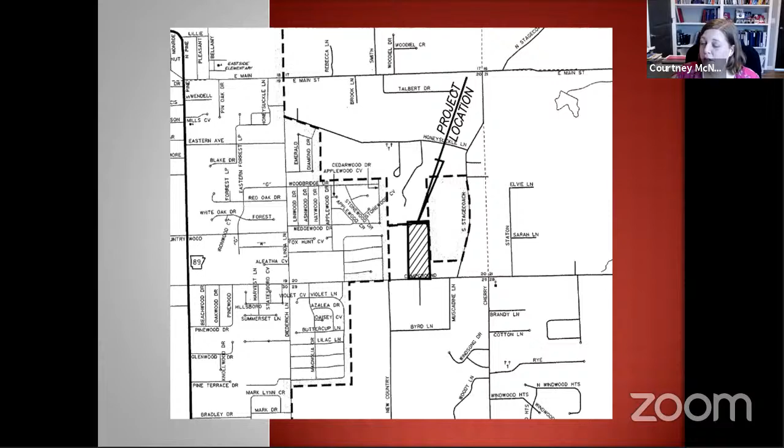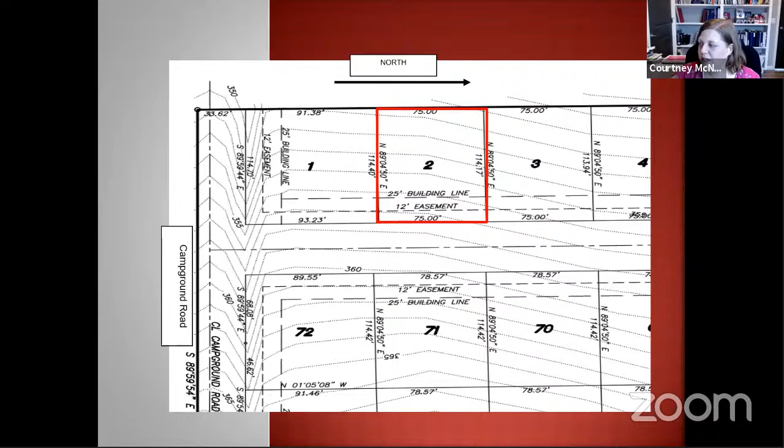All right, Courtney, you want to start us off with the staff report first? Absolutely. So this is one of the new lots in Heritage Meadows subdivision off of Campground Road, 12 Cimarron Circle, Lot 2. This parcel has recently been developed and it didn't even show up yet on the aerial, sorry about that. So it's Lot 2. What happened is the developer constructed a 30-foot wide driveway, and their intent was, because they know they have extra vehicles, to avoid parking in the street. Unfortunately, Cabot's code says you cannot have more than a 25-foot wide driveway. I do think, based on their application, this was a mistake. So they're asking for that additional 5 feet to be allowed to stay.

Okay, thanks, Courtney. Is the applicant here to speak to this item, or online, if anybody wants to speak to this, either for or against? Is this Randy?

Randy, you're on mute. How about now? There you go, now we can hear you. Thanks, go ahead. Sorry, I'm a little bit new to this Zoom.

Yeah, I'd like to speak for the developer, Kathy and John C. They've constructed several hundred houses in Cabot and Ward and Austin, and I don't think they were aware of this driveway requirement. The buyer of this particular property asked to have a wider driveway. It's my understanding he's a police officer, and I'm not sure what jurisdiction he's in, but sometimes he needs to bring the police car home. They were just trying to have an extra wide driveway so they wouldn't need to park on the street or on the sidewalk. So the developer, or the builder in this case, agreed to install the extra wide driveway. That's how we got to where we are.

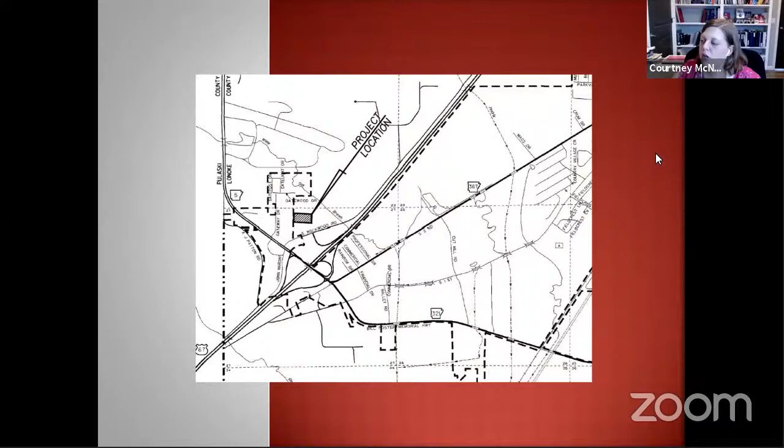Courtney, you want to give us a brief staff report? Absolutely. This is located north of South Rockwood Drive, accessed via an easement. This was an approved site plan previously. They got approval for 3 RV covered bays beforehand, but now they're coming back and asking for a smaller footprint overall on the building. What's on your screen right now is what was approved previously. As you can see, most of the site was incorporated. It's approximately 3.7 acres in size. So if you can see, that previous plan covered most of the site, and now they're asking for a much smaller footprint, but it's the same, very similar uses for RV storage and for parts and services. So it's changed the use just a little bit as well.

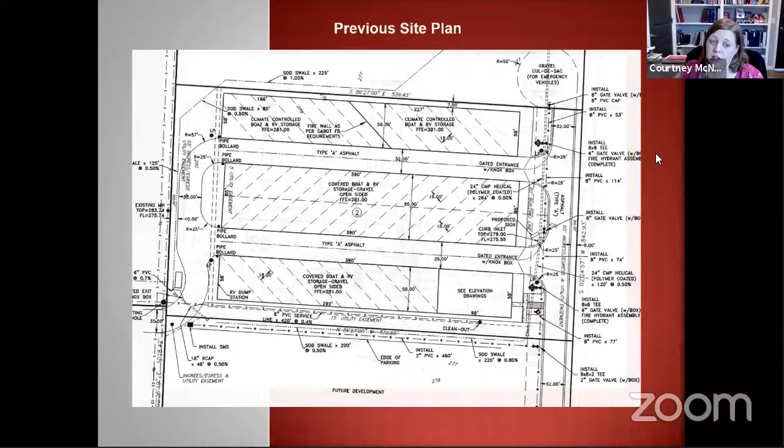Staff does have some outstanding comments related to parking. They are showing 13 parking spaces on the site, and we calculate that they need 30. We also may need to have a discussion about the dumpster. They would like to share a dumpster with the property to the south. As planning staff, I've commented that while these are two separate properties and can be sold separately, sharing a dumpster doesn't bode well necessarily for that. But if the planning commission wants to allow it, then you're allowed to do that.

We also don't have exterior elevations of the site, and the applicant stated that those would be provided by the architect, but I have not received those yet. They needed some additional drainage review as well, if the city engineer is on. They referenced the old plan for their dump station, but I think that probably needs to get incorporated into the new plans since they're asking for that, and the old plan would be void. But really, overall, they are covering less of the site, and they are requesting a similar use to what was approved. They're just doing a little more parts and services versus just storage like was approved before.

Okay, thanks, Courtney. I want to have Brian Vines come up and talk a little bit about the drainage calcs.

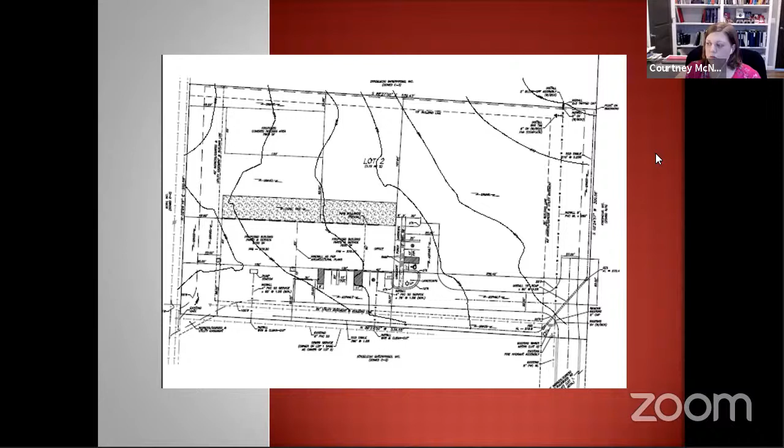So any other questions? If not, I'd entertain a motion. Motion to approve with staff comments. I recommend that you have a dumpster pad site on the plan. Okay, get a motion to approve for Commissioner Lowe with the contingencies and also with the dumpster pad location.

A second? I second. The second for Commissioner Ward. Roll call, please, Kim. Lowe, yes. Urban, yes. Prater, yes. Bird, yes. Ward, yes. Matty, yes. All right, site plan is approved with those contingencies.

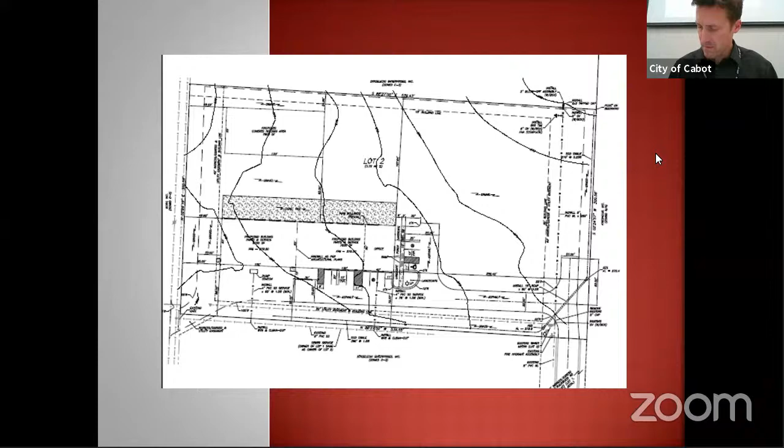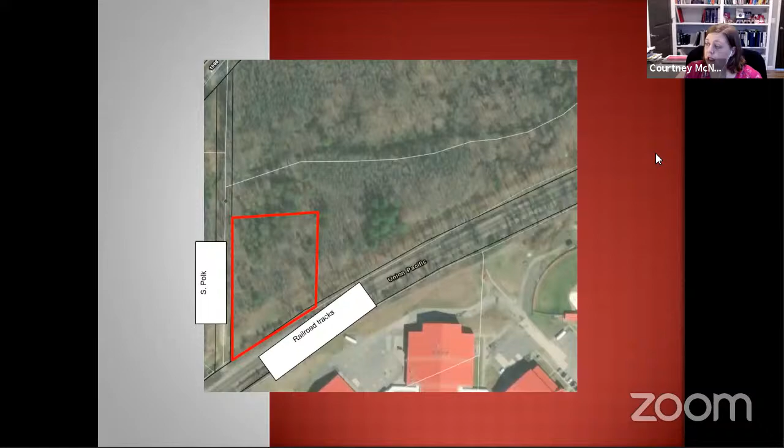Next item of business, item B. Final plat, lot 1, Good Earth Learning Center, Davidson Engineering. Courtney? Yes, so the final plat is just to split off lot 1, which is 2.19 acres. This is located off of South Polk Drive, just north of the railroad tracks. It was originally a 10-acre piece, and they are splitting off 2.19 acres.

Any other things you'd like to add to the presentation? No, sir, not on this one. Okay, all right, seems to be pretty short and sweet. Anybody have any questions? All the comments been met in the staff report.

Entertain a motion. Move to approve. A motion from Commissioner Lowe and a second from who was that? Prater? Roll call, please. Lowe, yes. Irvin, yes. Prater, yes. Bird, yes. Ward, yes. Matty, yes. All right.

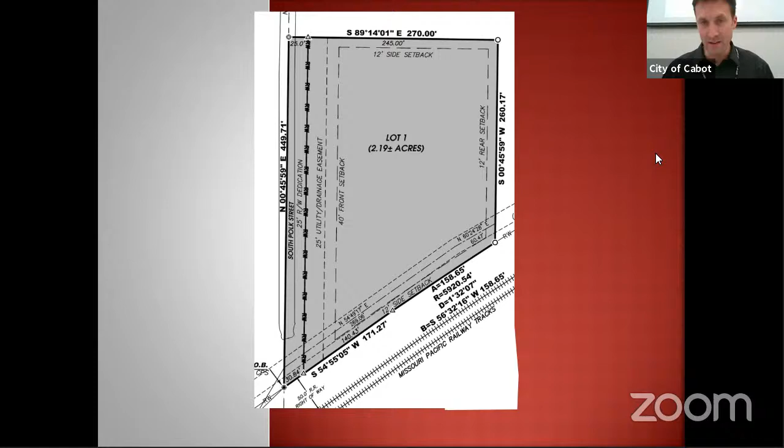Final plat is approved, so we'll go ahead and go into the site plan. Item C, Kim, site plan, lot 1, Good Earth Learning Center, Davidson Engineering. And we'll go back through Courtney again. Yeah, same site that we just talked about. This request though is for a daycare facility. It's a 4,600 square foot daycare, a 3,300 square foot pole barn, and a small 350 square foot office building and associated parking. There were several items remaining on this one as well.

Mostly there's some cleanup that needs to happen and some more dimensioning on the plans will make things more clear. The parking calculations, if we add, so their parking requires that they are supposed to have 29 spaces. And so we're going to allow the parking that is drop off pickup spaces for the parents to be used in that number as long as they don't block the accessibility and as long as there are signs posted that indicate that is not real parking. You have to keep moving. So that's per the fire marshal because that's also the fire lane. But staff is okay with the number of spaces as long as those conditions are met. So we can't block the ADA space and we need to post fire lane signs that say they cannot park there. Nobody can leave the vehicle.

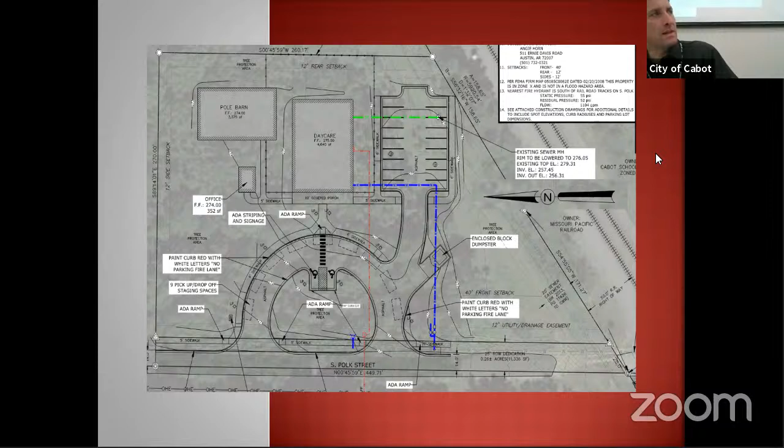Laura, did that make staff approval for that? Typically we would require sidewalks to go property line to property line. In this case, staff would not recommend going to the railroad track side of the property, to deter anybody from continuing to cross that railroad crossing, because we have numerous complaints from the railroad company about students leaving the school and crossing that area back and forth. So the railroad company is actually asking the city, as much as possible, not to do anything that would encourage traffic to go in that direction. And that crossing, the railroad company has said, will probably never reopen.

Does that sidewalk need to maybe just turn up and go north and try to loop back to the sidewalk? I'd rather see it engage the driveway instead of stub out and be a dead end, if you're trying to encourage traffic to go to the next development. So go around the drive instead.

Exactly. Okay, well we do have sidewalk on that south side, Mr. Young, instead of just continuing it. Oh, I see it, yeah I see it. Instead of continuing it another 20 feet or whatever that is, it makes a lot more sense for it to just connect with our drive, and that's where the sidewalk terminates. Stop there. Yeah, I agree with that. I'd be glad to make that change, if the commission's okay with that or thinks that's a good idea. Take that curve out, put some parking. That's right, that's right. All right, any other questions or comments?

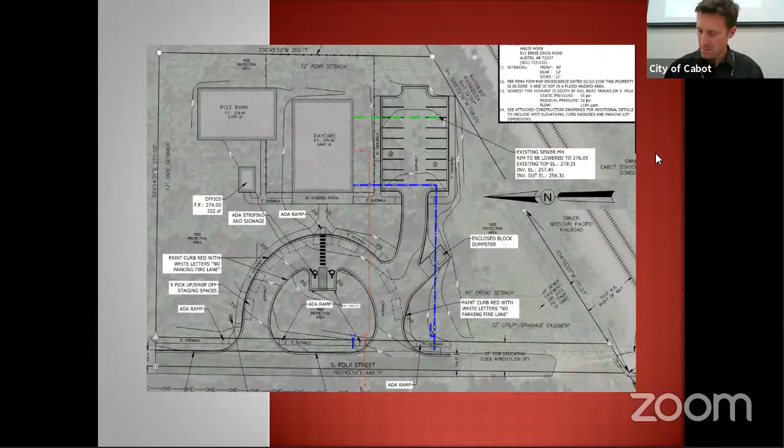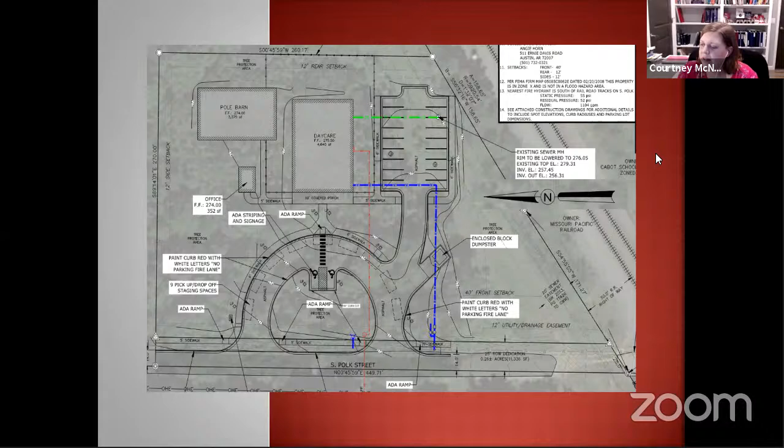All right, Courtney. Yes, this is located on Jaden Commercial Court, and there are 2 parcels currently. Lot 1 is 2.04 acres and lot 2 is 3.45 acres. The request is to combine these 2 lots into one lot that is 5.49 acres in size.

They just had comments on the certificate, like who owns it. Either we need the current owner to sign it, or they need to provide information that states the owner is giving permission. All of the other comments have been addressed.

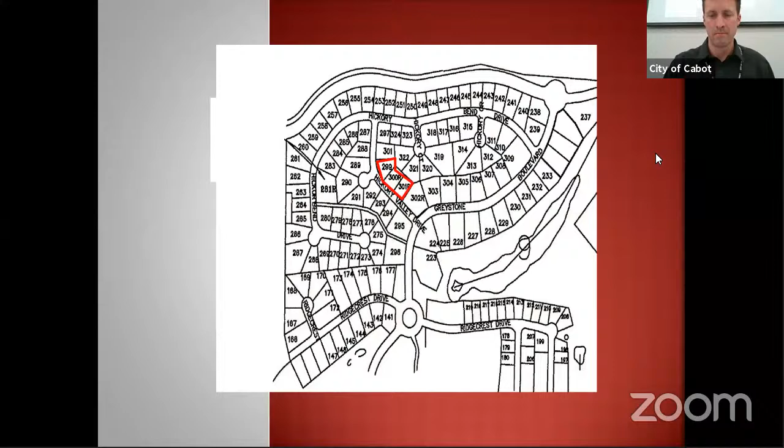If this is not approved, there will not be a transaction, and so we will not be recording the replat. So we're just holding off. If the replat is approved, they're going to go and close on the property, and then the buyer will sign as the owner. Easy enough, that's all we got to do.

Glad to answer any questions. Do the commissioners have any questions?

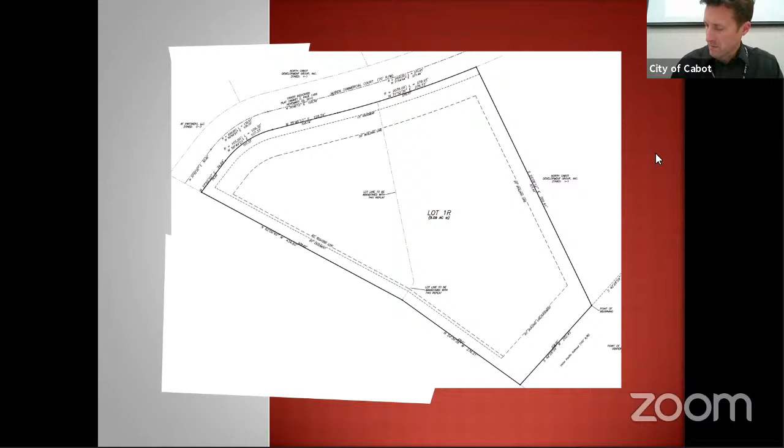I'd entertain a motion. Motion from Commissioner Lowe, second from Mowdy. Roll call, please. Lowe, yes. Irvin, yes. Prater, yes. Bird, yes. Ward, yes. Mowdy, yes. All right, that replat is approved.

Thank you. All right, next item of business: replat, lots 299R through 301R, Greystone subdivision, the Massey Development Group.

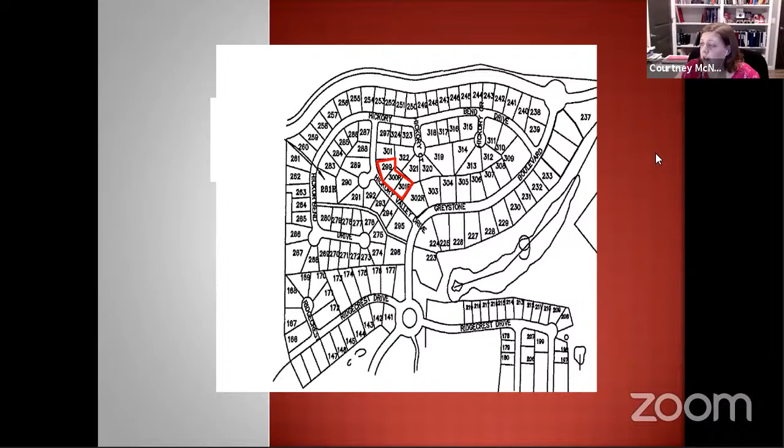Courtney: Yes, thank you. These lots are located on Hickory Valley Drive, highlighted on the plan there. There are 3 parcels, and what they want to do is increase the size of lot 301, which will be 301RR, the one on the south, by 10 feet, by reducing the size of lot 299R and 300RR by 5 feet each.

They don't propose to change the zoning, and there are currently no structures on the site. There's an existing easement between lots 299 and 300 that needs to remain because there are existing utilities in that area. They had all comments addressed except they needed to add the side setbacks onto the setback table. So overall it's 3 lots now, and it will still be 3 lots when they're done—they just want to shift the lines a little bit.

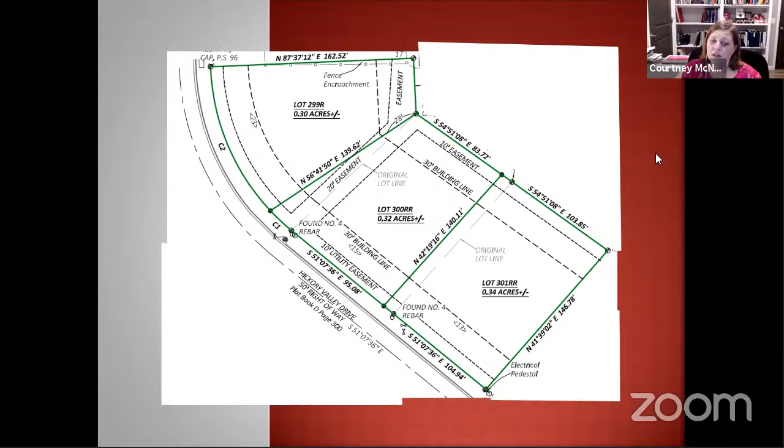Okay, thanks Courtney. Anyone here to speak to this one? Yes, this is Lance. The reasoning behind shifting the lines is we purchased all 3 of the lots together right before Christmas.

Normally we would just build what we can to fit inside the parameters of the lot lines. But the first lot is actually going to be a spec, and with the pandemic and the pricing of materials, we decided to do one at a time instead of all 3 simultaneously, which is what we normally would do. Anybody that's built knows when you go to the bank for financing, you have to have your house plans already ready to go. So we already had the plan finalized and had funding from the bank.

When we got out there with our surveyor to locate the lines, this all started because we were unaware that these lots had been replatted before. We were going off the information from the seller and the seller's agent. So we lost a few feet on the square footage of everything, and the plan is not going to work.

It has a 3-car side entry garage that reduced our plan down to around the 16, 17 foot mark, so a full size Tahoe or SUV would barely have enough room with the garage closed to even park. So we can either go back and readjust all the plans and go back to the bank...

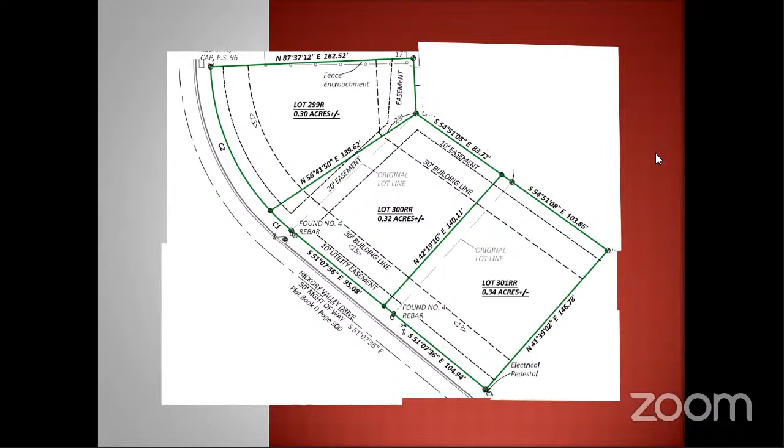...or try to work out a deal with the title company, since it didn't show up on their end during the title insurance search that there was already a replat performed. Or we're just requesting, since we own the other 2 lots as well, to take a little bit off each one. We don't foresee it being a problem for building those later—there's still plenty of space to do houses of like and similar kind. So that's the reason for the request for the replat.

Okay, thanks Lance. Any other questions for Lance or Courtney? Not hearing any, I entertain a motion to approve.

Make a motion to approve, from Commissioner Byrd. Do I have a second? Second from Commissioner Irving. Roll call, please. Lowe, yes. Irvin, yes. Prater, yes. Bird, yes. Ward, yes. Mowdy, yes. All right, the replat is approved.

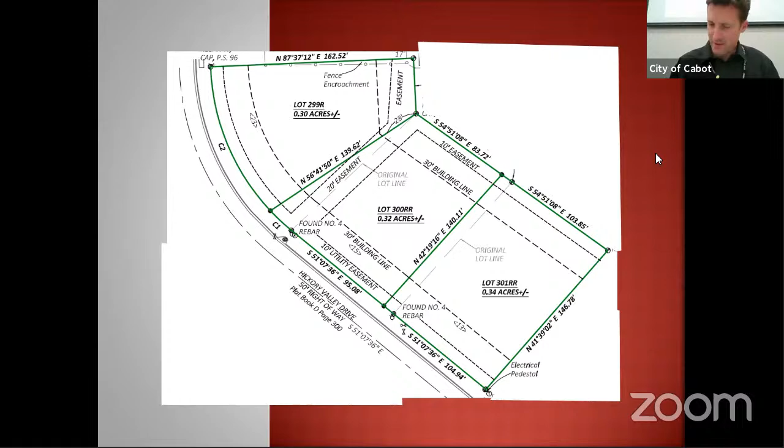Good luck, Lance. Thank you. All right, community input.

Anybody have anything for us? Alicia, do you have anything for us? All right, seeing none, I'll entertain a motion to adjourn.